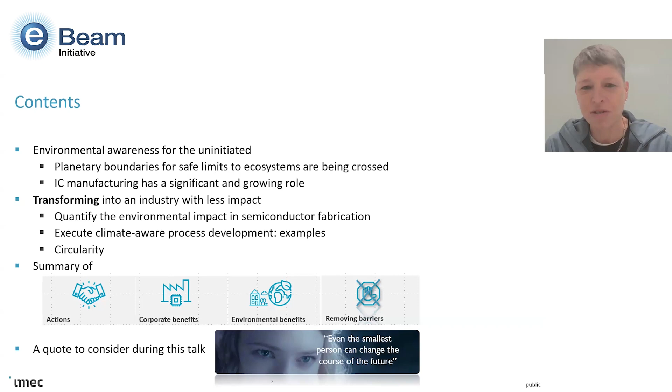So starting with the introduction. The Earth is warming, and there are lots of ways you can see this or maybe perceive it in your own daily experience, but I tend to go to some data.

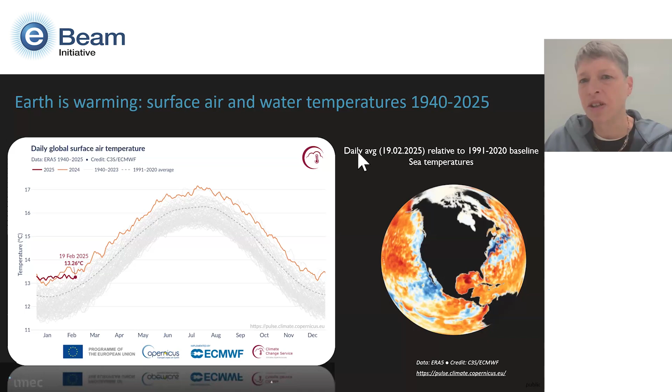And then you can go also to water. Here it's from the same website, but you can look at the daily average. I chose one that was pretty close to SPIE relative to the baseline, and you can see that the sea temperatures are also getting warmer.

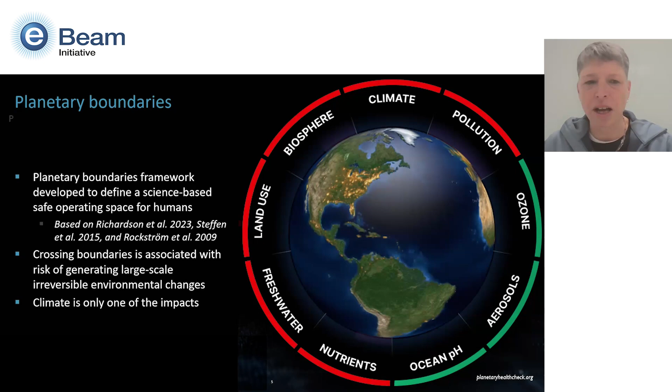But it's not just climate. There are other planetary boundaries. There is a framework that was developed to define science-based safe operating space for humans, divided into all these boundaries. You can see climate here, but also pollution, ozone, aerosols, etc. All of the ones that are red have actually been crossed. And as I mentioned, climate is really only one of those impacts.

Going a little bit further into the planetary boundaries, I won't stay too long on this, but the semiconductor industry contributes to many of the categories. When thinking about climate, we use process gases that have very high global warming potential, much, much higher, like thousands of times higher than CO2. We use novel entities that contain things like PFAS and microplastics, and we introduce toxic chemicals and heavy metals. So there are many of these boundaries that we contribute to.

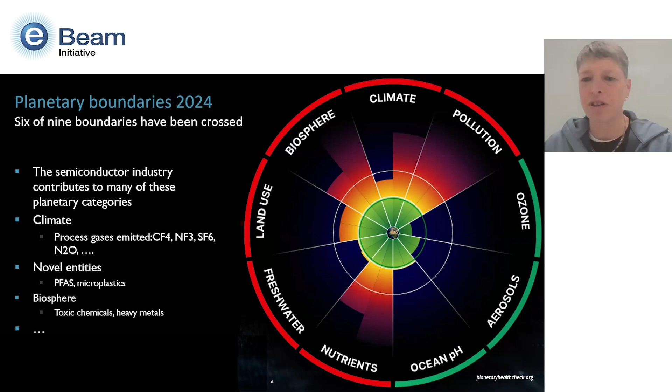In addition to that, the global chip market continues to grow, which is a great thing for a lot of our job security. If you look at the market in 2021, it was at 590 billion. Going into projections towards 2030, we're going to exceed one trillion dollars. So the growing demand for semiconductor chips is really driven by data centers, wireless communication, automotive, etc.

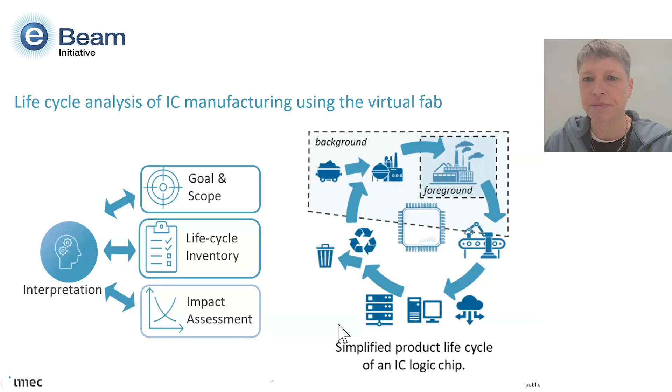So we have developed this virtual fab. It's not supposed to be any specific fab, but representative of a high volume manufacturing fab. And to do that, we have detailed knowledge of tools, of processes, and of materials. And then it's important to be able to put those together into process flows, whether they're logic or memory or packaging.

And then in addition, we need an understanding of the fab models. So for example, how many tools you would need to keep full capacity, what kind of uptime on the tools, what type of abatement is used, what the die size and yield expectations are.

So all of that is rolled in and generates, first of all, an inventory - really what is used to make an IC chip. And then that's not good enough because you also have to know what the impact is. So for example, if you use a certain process gas, you want to know what the global warming potential of that gas is. And there is a standard for that, EF 3.1, that we apply.

And so putting these two things together, the inventory and the impact, we're able to get the environmental impact of IC chip and system manufacturing. So it's parametric and it provides a proxy for the manufacturing itself.

So the advantage of this bottoms-up methodology is that the results have granularity. So you can identify high impact steps. They're actionable. You can check sensitivity and the results can be projected. So you can pathfind towards future nodes and make decisions about where you want to go that might have lower impact.

And throughout this, I will show a number of results from using this virtual fab called imec.netzero. And I tend to put some of the details that some people might be interested in a gray box. So you'll see something that looks like it here.

If I don't actually state it, the N2 is the logic node that I'm using. I tend to take an industry average for the carbon intensity of the energy used - whether you're using, say, coal-based energy or oil-based or nuclear. Nuclear is actually very low carbon intensity, or renewables of some kind. And what type of abatement is used, and also the volume of the fab. So 60K wafers per month is sort of a standard that we use. And then expectations about yield and die size, I kept those all constant.

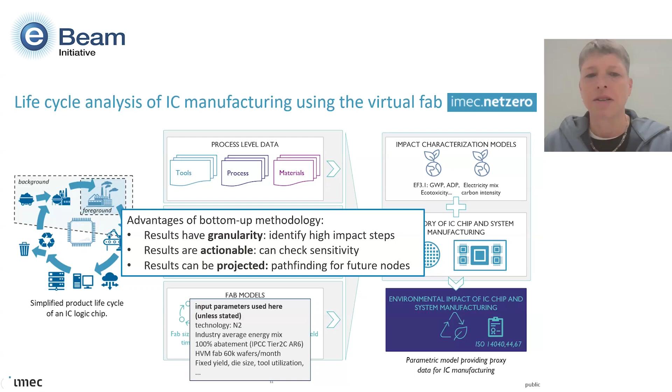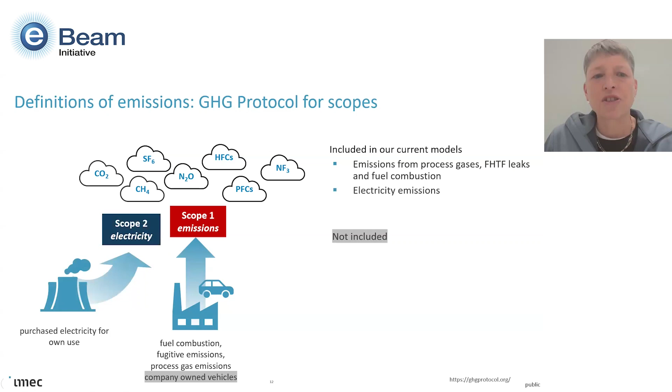Scope 2 is the carbon generated to produce electricity, and scope 3 is really everything else. For us, what we focus on is the production of purchased materials and upstream electricity. We don't include the use phase or business travel.

Notice that I've got a color scheme going here with the scopes, and I'll stay consistent with that. So if you see a little red box in the upper right of a chart, I'll be talking about scope 1. Same thing for scope 2 or scope 3.

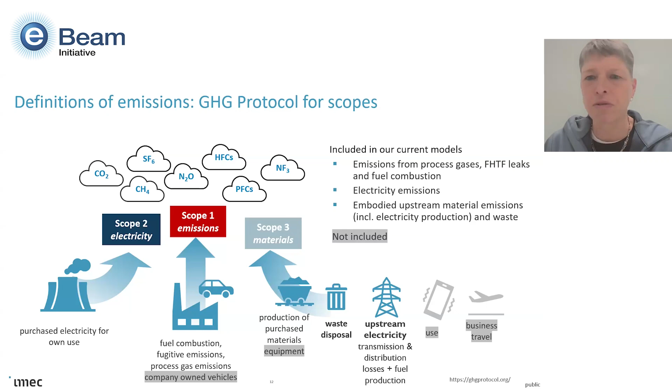So first of all, let's focus on energy. Scope 2 - when you talk about scope 2, that's a process that might consume a lot of energy. It tends to bring up lithography, and that's where I will go here.

So scope 2 focus - the reason is if you look at a baseline technology and climate impact lens, I'm comparing two technologies here: N28, a more established node, and N2, which is representative of the leading edge. This is broken down into scope 1 emissions, scope 2 electricity, and scope 3 materials.

There are a couple of things you can see here. Emissions increase with more advanced nodes, and that correlates with the number of process steps - it's about 2x in terms of emissions. The other thing to notice is that 60% of the emissions comes from scope 2 electricity.

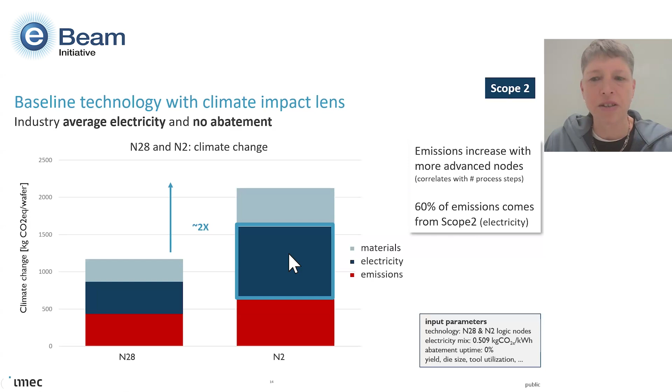But then we can drill down further and break down this scope 2. This is only scope 2 for the advanced node, the N2 logic node, and you can see which ones take the biggest part. Over 21% is from litho scanners, then next comes dry etch, and then deposition. So patterning consumes an enormous amount of the scope 2 budget.

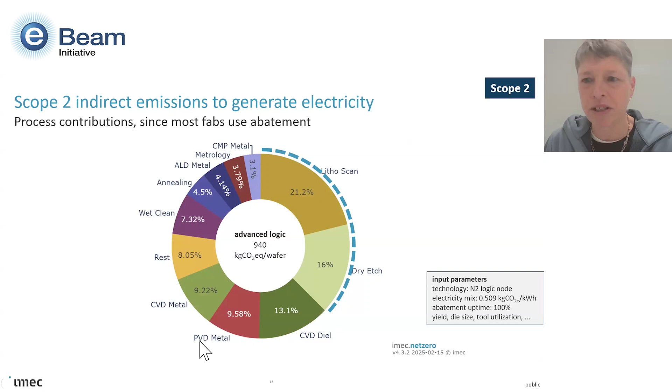Looking a little more into the trends - only looking at scope 2, I'm normalizing everything to N28, taking it through N7 node done without, and then with EUV, and then N2, which of course uses EUV.

A few things you can notice - this is broken down so each color is associated with a different process area, so you can see which ones contribute the most.

First of all, when we go from N7 without to N7 with EUV, there's a reduction in the number of steps because you've eliminated some multi-patterning, and that reduces overall emissions. The second thing to notice is that lithography in general has a huge, large and increasing contribution to the overall scope 2 emissions.

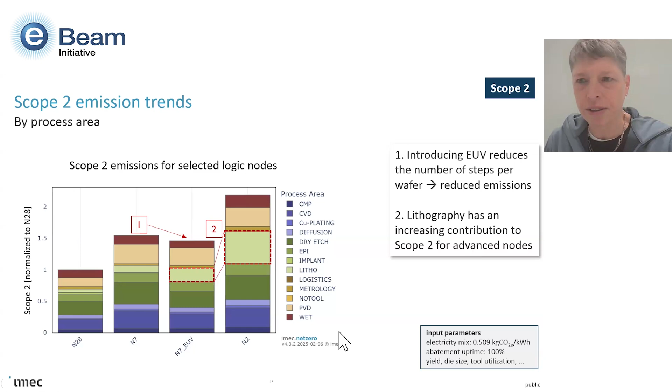So the question is, what do you do about that? imec not only developed imec.NETZero as a platform to assess, but we also work on processes in a real fab, a 300mm fab, and develop them towards the future. Part of that development involves EUV dose reduction.

I'm just going over here the knobs that we have for a holistic solution. You can work on your reticle and imaging, you can work on materials, and you can work on the process itself. Those are the knobs available to you.

The example I'll show for today is a materials example, specifically photoresist. This is work that was presented by Mihir Gupta at the conference. The goal here is to reduce EUV dose to defectivity and characterize the impact in terms of CO2 equivalent - meaning you take whatever emissions are generated and use this common unit, CO2 equivalent, for emissions.

The work was done on a 0.33 NA scanner. The pitch was 28 nanometer, and the target was M2 layer for an imec N5 node.

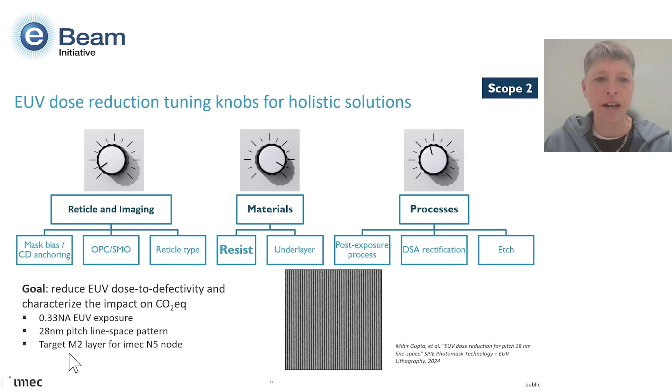If you consider 4 different resists - this is just a cartoon of the patterned resist on top of the layers, 28 nanometer line space - as you look at these 4 different resists, you can see this is unbiased line width roughness. You want to reduce that as much as possible as a function of dose. These different resists behave differently.

The idea is that if you were operating here on this green or even the purple resist and you shifted towards the blue one, you would have an 18% dose reduction. That was the function of a lot of work - it all looks very simple here, but in addition to reducing line width roughness, you also have to look at your failure-free latitude.

So the limit for that is shown here, and you can see that this resist number 3 performs quite well. So we have a candidate that allows you to reduce your dose by 18%.

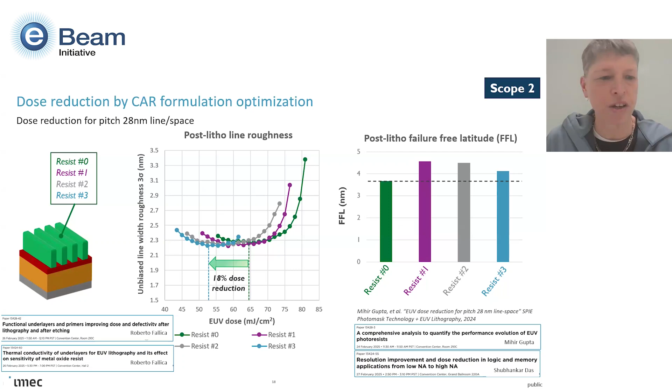Well, what does that do to environmental impact? Oh, I should have mentioned, there were a number of papers that all deal with dose reduction, and those references

are given here if you want to look them up on the SPIE website. Well, we came up with a way, and this is version 0 of what we called e-scoring. We have since updated it, and newer versions will be presented in the future. But in this case, we selected 5 key impact or inventory parameters that have reliable data in our databases. Getting good data in order to do climate impact can be a challenge, so we wanted to restrict ourselves to places we had relatively high confidence.

So what we focused on were climate change, ADP, which stands for abiotic depletion potential. It's a proxy for total material scarcity, so just think of it as material scarcity, and then water use. And we chose water drawn from the network. This tends to correlate with UPW or any other type of water.

We report a test relative to a reference and then generate a percent difference for each parameter so that everything's in percentage and we can put them on the same chart. And we use a spider or radar chart to visualize the impact.

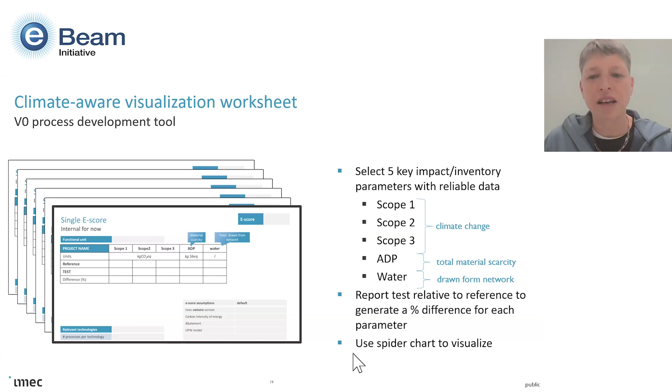And you can see where this 18% dose reduction had an influence. So basically everything but water use was lower with this 18% dose reduction.

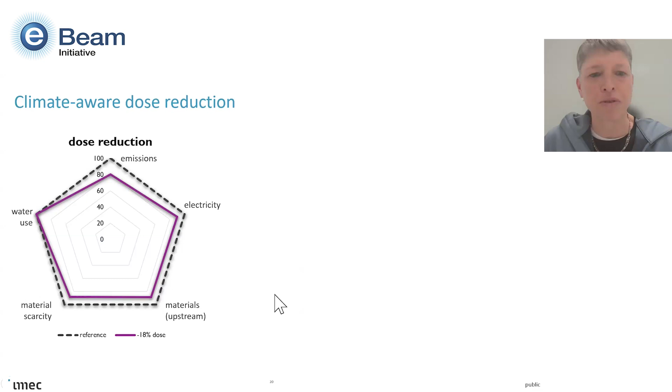And some of you who are familiar with photoresists might say, okay, that's great, but doesn't PFAS have an impact on climate? So I'm not going to focus a lot on PFAS here. One of my colleagues, Danilo De Simone, had a very complete talk on that. But what I can say is this methodology doesn't fall apart if we add more information.

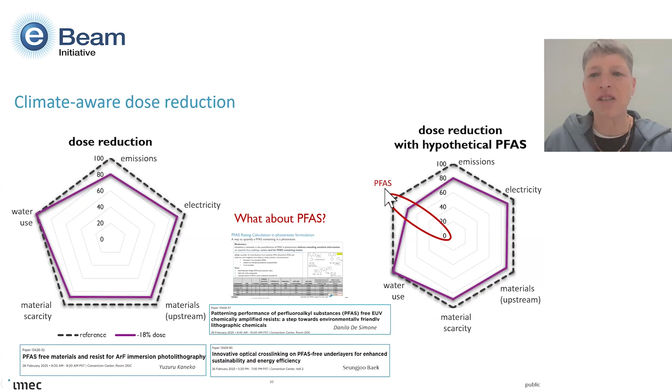So for example, you could say hypothetically, well, I also reduced the amount of resist I used and PFAS is lower. Then you could just add another axis to represent that. And that's the nice flexibility of this spider chart visualization.

So now we'll shift gears to direct emissions, scope 1, and that will push us towards abatement and dry etch discussions.

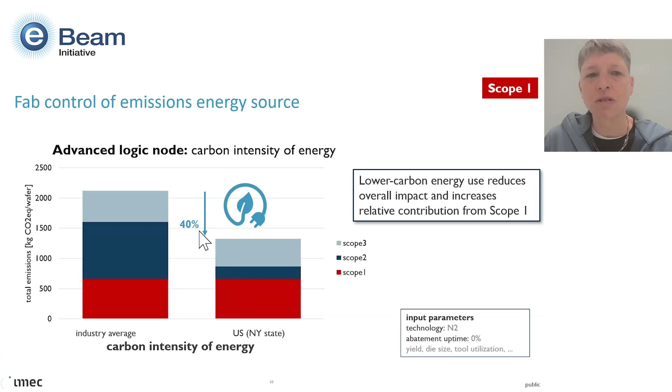And so when you do that, you reduce the amount of scope 2. And so what we see is that using this lower carbon energy reduces the total emissions by 40%, a pretty large effect. And also, once you've done that, scope 1 begins to have more importance and obviously requires more attention.

So if you do now a breakdown of just scope 1 emissions by process area, dry etch shows up as the dominant contributor.

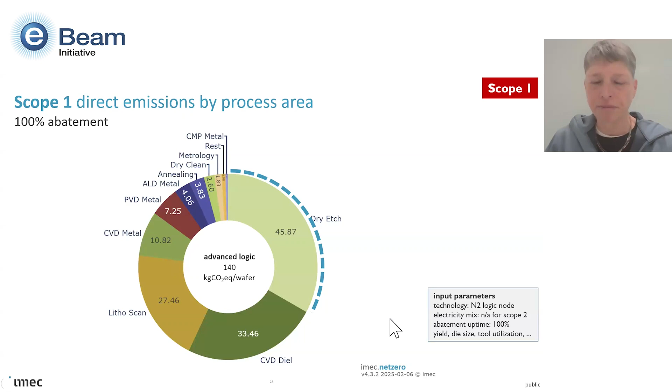So the reason for that is a lot of greenhouse gases are used in IC manufacturing. And just as a review, greenhouse gases are those that absorb in the IR, trap heat, and are greenhouse gases. An important metric for those types of gases is called global warming potential, meaning it's always relative to CO2, so the amount of gas absorbed over time relative to CO2.

So as I mentioned, a lot of the gases used in our industry are a lot worse than CO2, and you can see, as SF6 here with over 24,000 times the impact of CO2, meaning you release 1 kilogram of SF6, it's equivalent to over 24,000 kilograms of CO2, a huge multiplier.

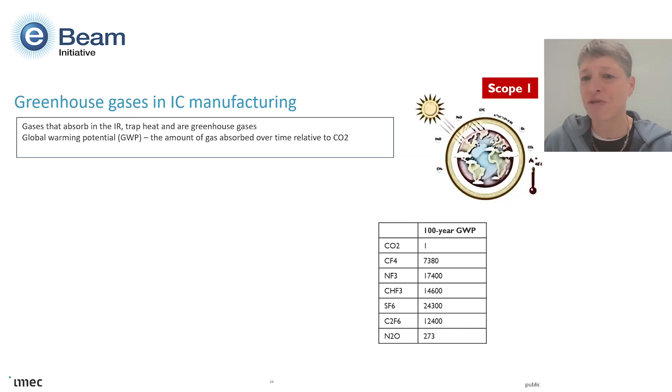And what's important too is how long they live. So the 100-year global warming potential is a standard that's used. It means you wait 100 years and then you say how much more the impact is. So it's not like this is just for a month or something. It stays in the atmosphere for a long time.

So if we now do a Pareto of process gas emissions as a function of process gas, clearly global warming potential is one component, and the gas volume used in the process is another. I should say this is without abatement, meaning you use a gas, it comes out of your process, there are byproducts, those are all added together, and that's what's being reported here. This assumes you're not trying to burn or get rid of them, you're just releasing everything. So if you do that, you get a Pareto where CF4 dominates, and NF3 is second, and it goes down from there.

With abatement, the numbers will change, and the reason is something called DRE, the destruction efficiency of your abatement system. This means you're either burning or otherwise destroying the greenhouse gases before they're released. This DRE number has a maximum of 1 if completely destroyed, and otherwise some fraction of it, so you can think of it as a multiplier. Importantly, CF4 does not have a very high destruction and removal efficiency. There's a standard for this called IPCC Tier 2C AR6, and those are the values I'm quoting here.

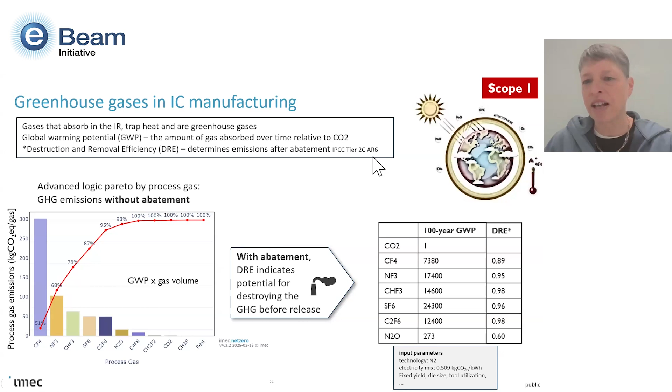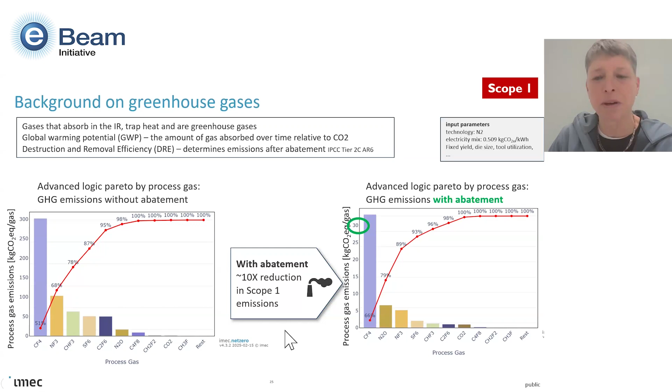So then, what can we do to reduce greenhouse gas emissions from processes? If you think about relative greenhouse gas emission as a function of time to develop, there are a couple of options. From the facility side, you can apply and maintain abatement, that destruction of the gases. You'll have a pretty short time to implement and a pretty large influence, but you'll always have some emissions associated with running abatement and/or the byproducts. Then there's process action, optimizing existing recipes with the same gases. That's a lot faster to implement and has lower risk, but in the end you'll still have some emissions for the same reasons.

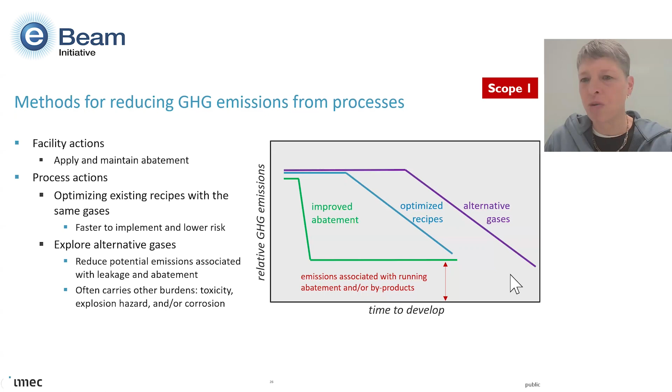And then the final option is exploring alternative gases. This takes the most effort to develop, but eventually you could get to a point where you're in a better space than with either of the first two options. The challenge is it often carries other burdens such as toxicity, explosion hazards, or corrosion. Also, a tremendous amount of energy was invested over time — meaning people and engineering effort — to develop the best possible processes with the current gases. So there's a long learning curve to overcome in order to match that.

And there are some talks, this one from Air Liquide given at SPIE, that we'll talk about in more detail.

What I'll provide an example of is optimizing existing recipes with the same gases. So I'll give you an example of this work.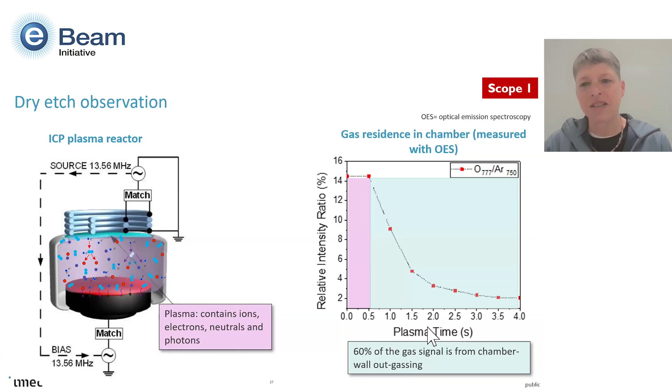So basically that process is called transient assisted process, or TAP etch. We applied it to a 28 nanometer pitch, full stack. We had photoresist patterned, and the idea is to transfer it down into the blue titanium nitride layer, which is the hard mask.

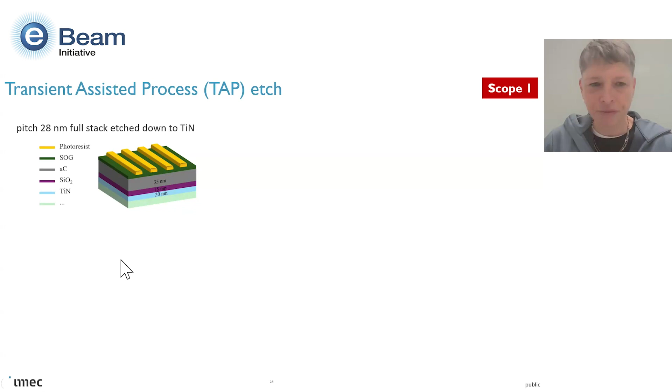On the right is a couple of different layers of the process schematic, starting with the gas injection, the carrier gas, and then the reactant, and then looking at the density of the reactant in the chamber. This is the pulsing region and then the decay, and one cycle is the gas step and then the plasma step.

If you look at what is used for gas 1 and gas 2, we've listed those out for each of the different layers that we're etching. Each cycle takes about 3 to 5 seconds, and the gases used for each one are shown here.

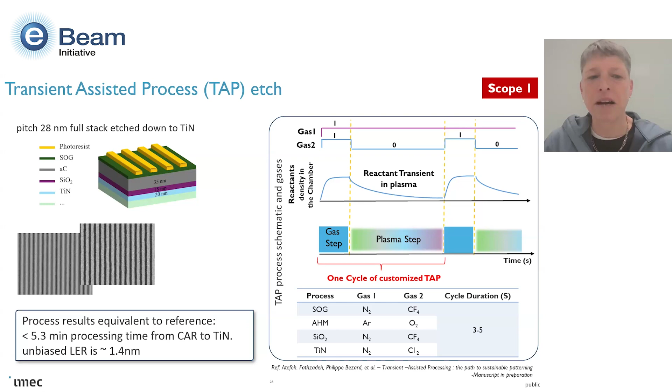And the process actually works. This is an example of top-down SEMs. The results really were equivalent to our reference process, less than around 5 minutes of processing time, going from this chemically amplified resist down to the nitride with an unbiased LER of about 1.4.

But what about the climate impact? Well, one of the key missions was to use less gas. So what I'm plotting here is relative volume of gases for the reactive ion etch process of record in blue, and this TAP process, which is the experiment, in green.

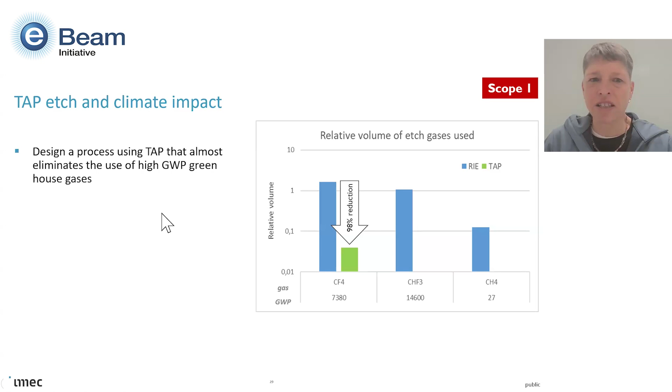So what we did is design this process, and you can see that really did have a tremendous effect on the gas use, in terms of 98% reduction on CF4 and elimination of the two other gases.

What was unexpected is when we used our visualization of climate impact, we saw that the process of record here should be at 100%. And this first version of TAP, shown in orange, was a longer process. It was much longer, and because of the length of the recipe time, it consumed more electricity, materials, and water, and you see that increase of the footprint.

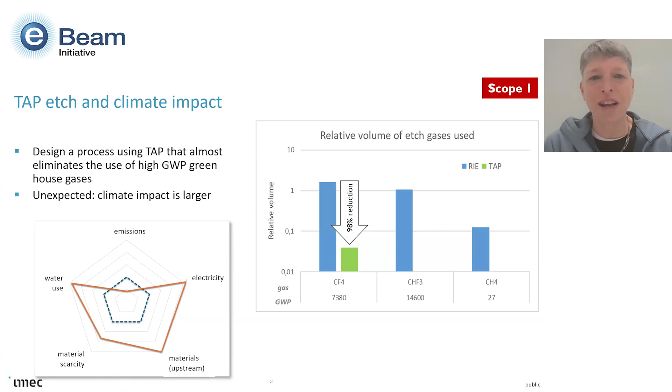So with this larger impact, we don't feel like we have a good process yet, and we kept working on it.

In order to understand where to put effort, we looked at the time per step. I mentioned the recipe got longer. So this is time per step, same y-axis. And we noticed that if we just isolated to this one amorphous carbon layer, the RIE process was much, much shorter than it was for this TAP hybrid.

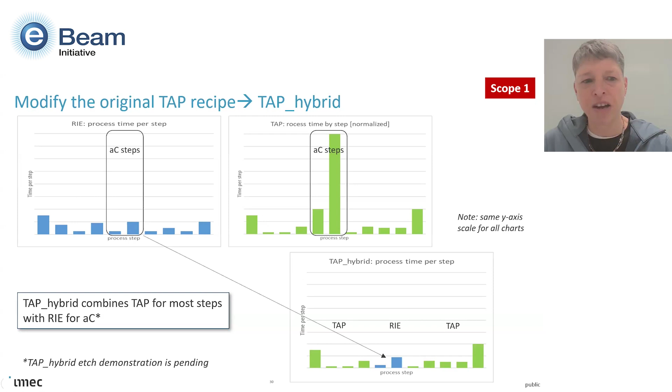So we created a TAP hybrid process, which combined the reactive ion etch for just the amorphous carbon steps and left TAP for the other ones. And the question is, how does this hybrid process look?

So if you go to the climate impact visualization, you see the process of record, our first attempt that was all TAP, and this new hybrid one that clearly has a smaller footprint. So it gives you the advantage of looking a little bit holistically at your process changes, to make sure you're not just shifting the burden from one area to another.

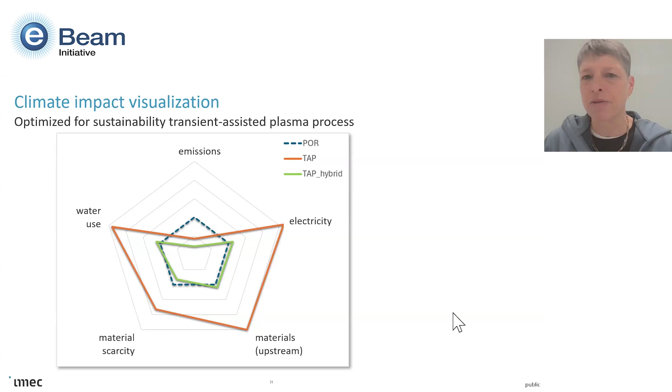So let's talk about materials now. You should be getting familiar with this chart. It's total emissions, and I sort of choose what I put here to bring up something different. I'm trying to focus more on scope 3, but I've given you some review.

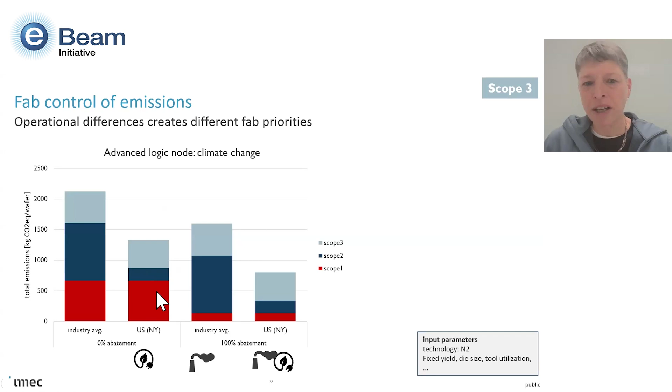So at 0% abatement, meaning no destruction of the process gases, as you move to green energy, you get to this point. But now, if we're looking at the abatement case, you see that the same trend shows: when you have greener energy, you reduce the overall impact.

It's important to also notice that scope 1 can be reduced by adding abatement. It doesn't matter whether you're using green energy or not, in either case you are able to reduce by adding abatement. But once you get to this final state with complete abatement and greener energy, you see that scope 3 is dominating, and so we need to pay attention to that as well.

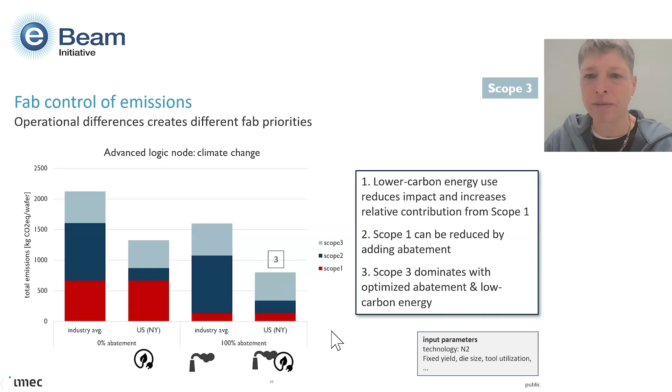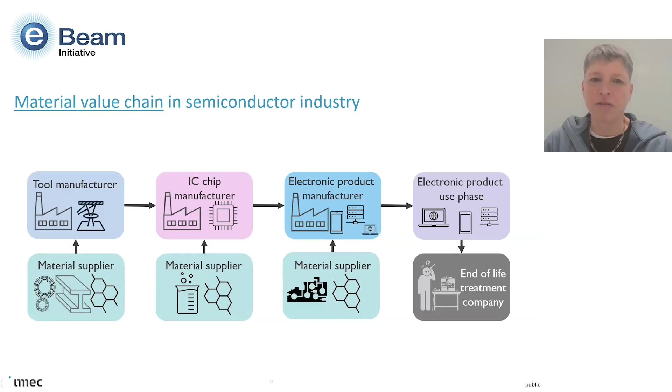In order to do this, maybe consider the material value chain in the semiconductor industry. So you have tool manufacturers, IC chip manufacturers, electronic product manufacturers, and then finally you have electronic product use phases and end of life. Each of these segments has a material supplier, and they might be different types of materials, but they all play into it. And in each case, you can consider both on-site recovery and reuse, and off-site recovery.

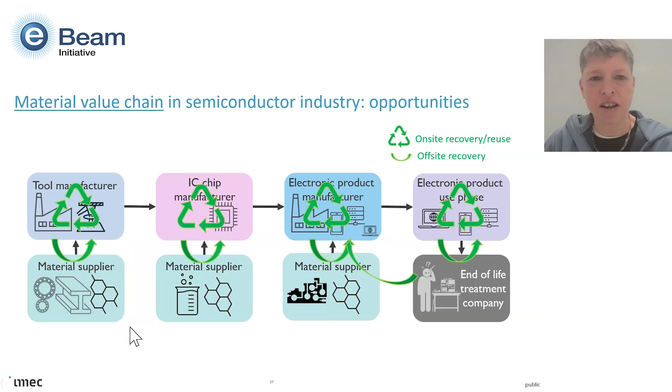But one of the challenges is there's so many materials used. What's the best way to prioritize this effort? So we'll focus on the IC chip manufacturer and talk very specifically about one use case, which is the EUV scanner.

So for that, there is an EUV source and there's hydrogen abatement. And it's important to know that hydrogen is essential for both the source and scanner function, it keeps the optics clean.

If you're going to think about a process from an environmental impact perspective, it's important to consider the inputs and the outputs. So photoresist is obviously one input, and it goes to waste. But there's also electricity that goes to each of the components of the system.

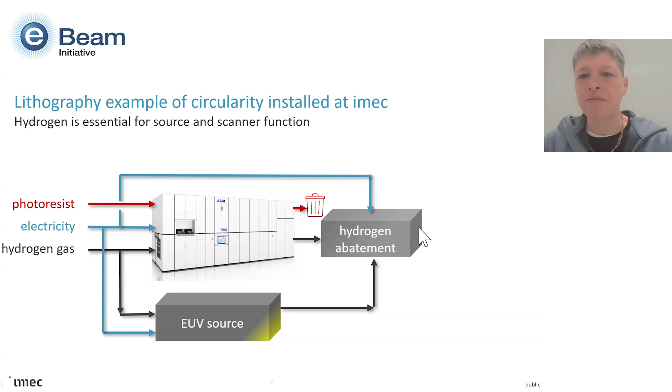And in the case of the EUV scanner, as I mentioned, there's also hydrogen gas, which comes in here, goes into the hydrogen abatement. It also goes into the EUV source itself. Both of those cases need to be abated, and that consumes energy.

So at imec, we looked at a hydrogen recycling unit to see what impact that would have. Basically what this does is it takes 70 to 80% of the hydrogen used in the EUV scanner and is able to recycle it back to reduce the total use of hydrogen.

If we look at that from the climate impact perspective, the standard abatement is shown in black. And when you use this hydrogen recycling, you're able to reduce many aspects of your environmental impact. So recycling is clear, and this did include the energy required by the unit. It's clearly an impactful thing to do.

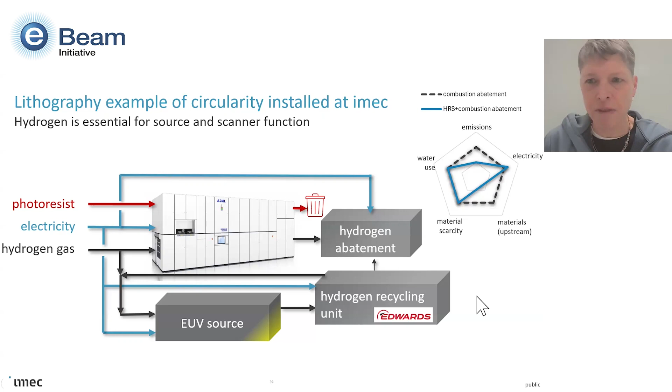So shifting gears a little bit and talking about critical materials. One incentive for looking at recycling is considering what materials are in fact critical, meaning that there could be a risk to supply.

And this is not with the semiconductor industry in mind. It's just a paper that we're quoting here, and it splits up different chemicals by region, whether it's Japan or the US or the EU. And stars are next to these critical materials that are also consumed by IC manufacturing.

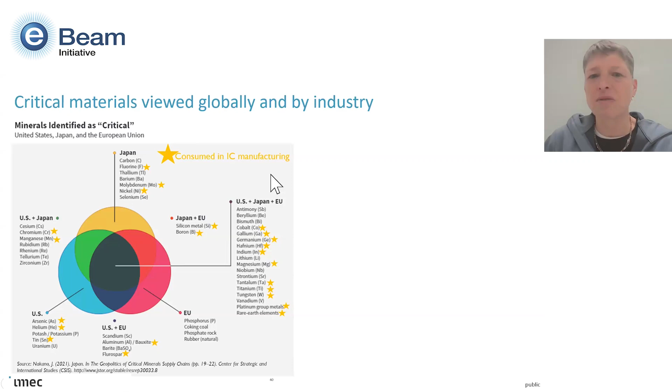So one thing that's important to know is we're not the only industry, right? A lot of these are also used by growing sectors, like electric cars or electrical networks or greener energy. So it's important to understand that the supply chain will become under stress, and this is a huge reason for worrying about recycling.

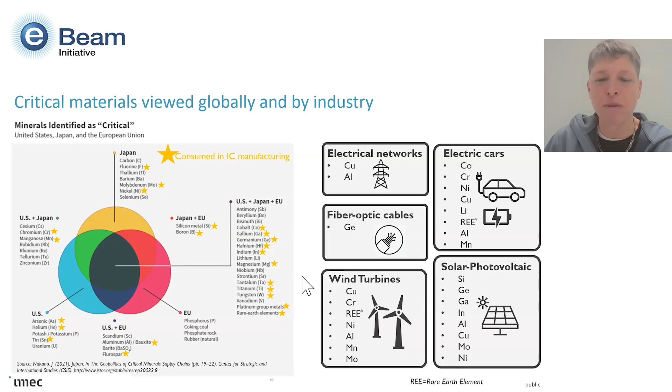So it's hard to do that without some level of priority. So what we did was develop an initial method.

A value is assigned to each circularity factor. These are the 6 factors: whether it's critical, how easy it is to recycle, if there's regulatory risk for the material, if there's any value to the material after it's used, what the embodied GWP is, so how much emissions were generated to make the material itself, and what the mass of the material is, so all the volumes used.

So all of these things are considered and given a weighting factor. In our case, we applied equal weighting, so that means that a larger value is a good candidate for circularity. And then we ranked the top ones here so you could see them.

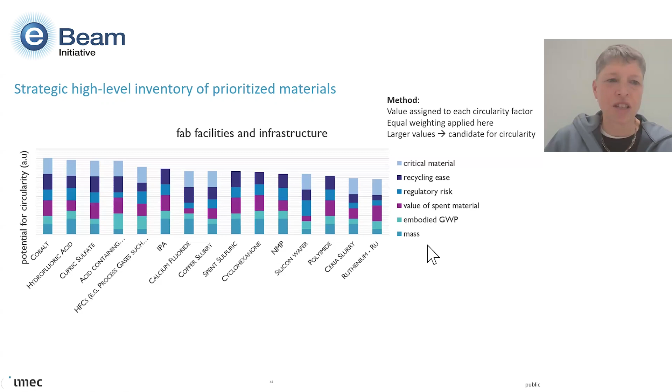And important to notice, IPA, ruthenium, NMP, slurries - a lot of things are here that are important to our technology. And I should say this is just a very preliminary effort to try and give a better sort of quantification of circularity and what we should spend our time on.

But there is an effort between imec and SEMI, a collaboration on material circularity, that is kicking off. So if you're interested, you can contact Lizzie Boakes from imec or any of the other people listed here. The idea is to come up with a methodology for identifying the priority materials to help with recycling efforts.

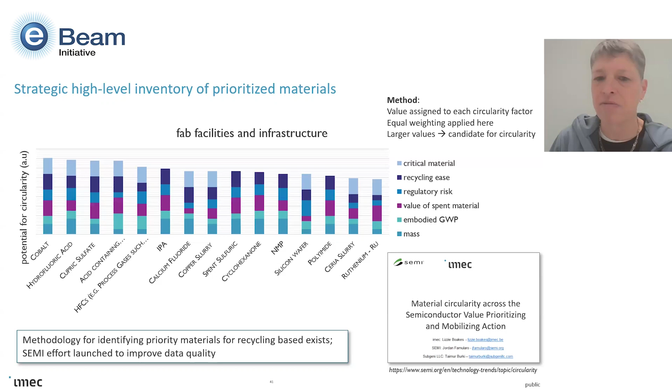And I had started off giving you a picture of two eyes and this quote: even the smallest person can change the course of the future. So I think it's important for us to think about our own individual actions, but also what industry transformational actions are. And in case you've had time to think of it, she was speaking to Frodo, the Hobbit. He's very small, but basically able to make a difference.

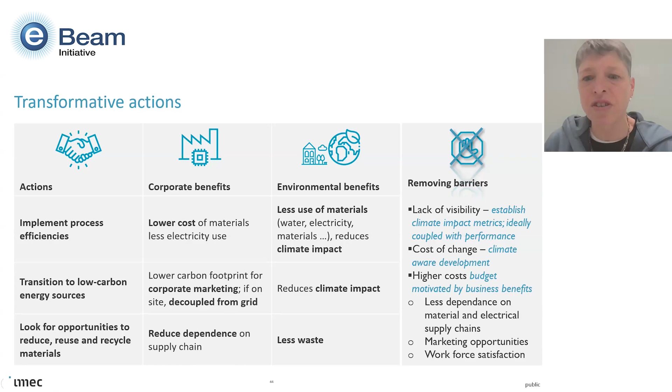So lots of ways to remove barriers and lots of opportunities for us to focus on transforming the industry. And finally, sticking with the Lord of the Rings theme, Gandalf had advice for that small hobbit. What he said was, all that we have to decide is what to do with the time given to us. I think that's something we can all think about. We have jobs, but we can do them differently. And this is a wonderful time to be thinking and acting on the impulse to have less impact on the planet.